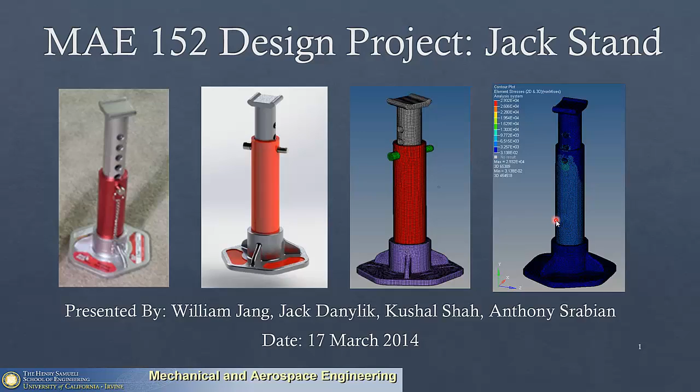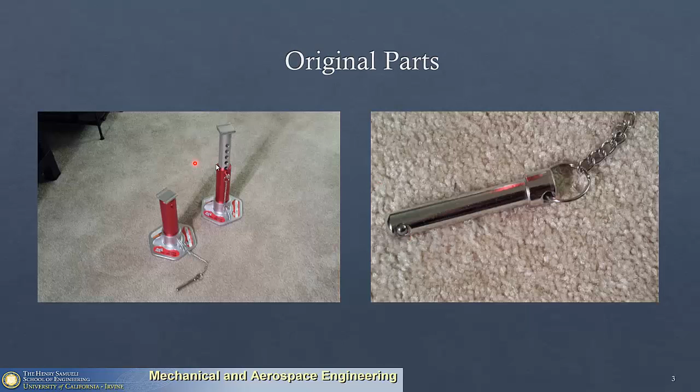The materials for the jack stand: essentially everything is an aluminum alloy besides the pin, which is made out of steel. These are the boundary conditions that we analyzed.

For our initial boundary conditions, we fixed one edge in all degrees of freedom and had rollers on the rest of the face. Another condition we analyzed was having only one node specifically fixed and then two other nodes with rollers. Both of these cases were simply supported.

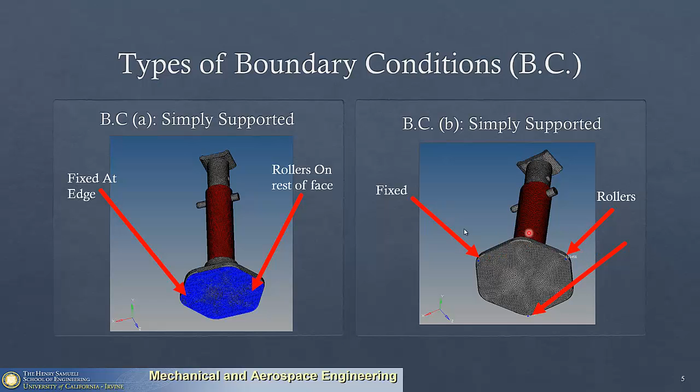The types of loading we analyzed included a distributed load on the center face of the top of the jack stand, and another load case applying all the load onto just one lip of the jack stand.

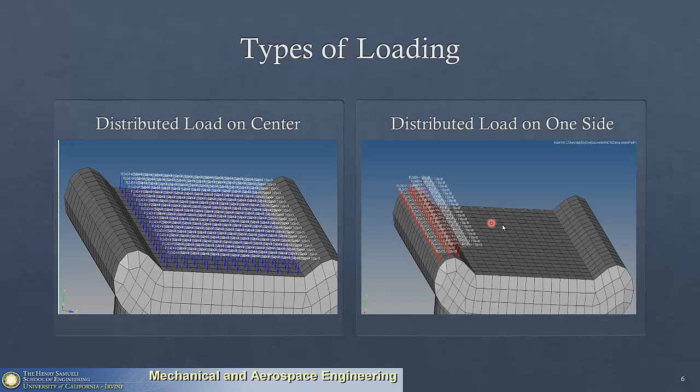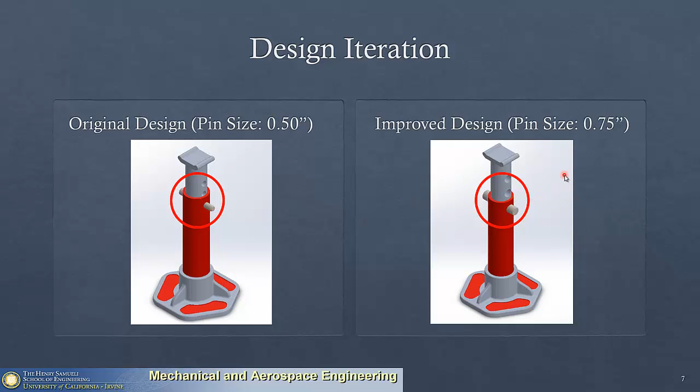For our design iteration, we determined that the pin was a limiting factor for our jack stand in terms of capabilities. So what we did was increase the diameter of the pin and also the hole diameter in order to improve the design of the original jack stand.

Now we're going to go through the studies of the original design. We put a 2-ton distributed load on the top of the jack stand, with a simply supported boundary condition at the bottom face.

These are the results from that study, and we see there's a concentration of force where the pin interacts with the two parts of the jack stand. The maximum stress is around 30,000 psi, which is pretty close to the yield strength of the aluminum alloy.

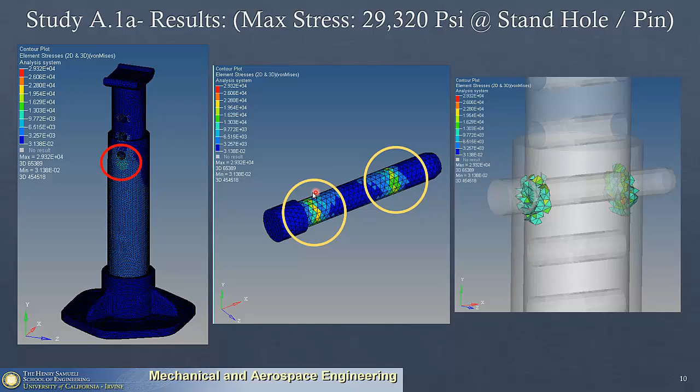The pin is stressed, but not nearly as stressed as the aluminum because the pin is made out of steel. Still, there's a high concentration of stress on the area where it interacts with the jack stand, so we wanted to test to make sure this was correct.

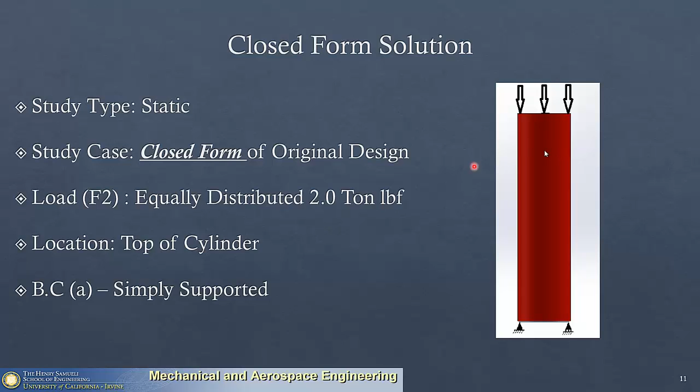We did a closed form solution where we modeled a hollow cylinder part of the jack stand and put a 2-ton-pound force on the top, also simply supported. We calculated all the math out, and figured the average stress on the cylinder should be around 3,018 psi.

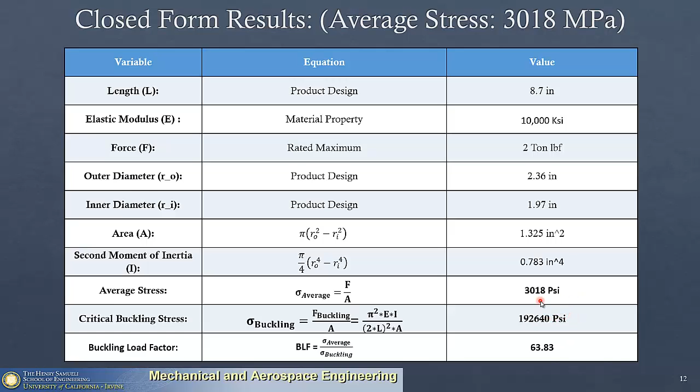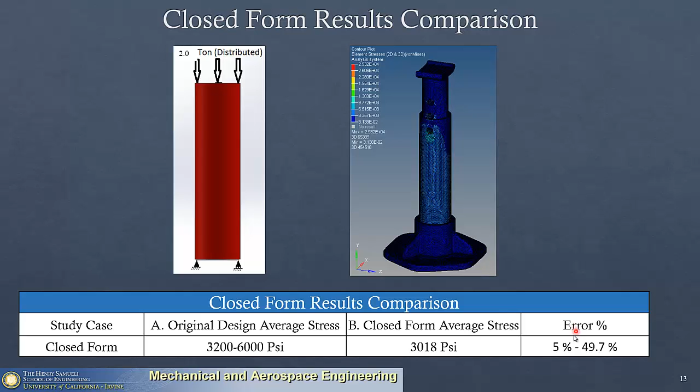We also ran buckling just to make sure it wouldn't be significant. With this closed form solution, we see a pretty good agreement with our model, because on the original design, the highly stressed area is only where the hole is, where the pin goes through. On this area, we see it's much closer to the 3,000 psi estimated average stress the closed form solution provides. We have about a 5% to 49% error, but that's really just because of the hole, which was not accounted for in this closed form solution.

We wanted to verify that our boundary conditions chosen to model the jack stand were accurate. So we ran study A-1A, but with new boundary condition B, where we have 3 nodes which are the fixed portions of the model: 1 is fixed and 2 are rollers, so it's still simply supported.

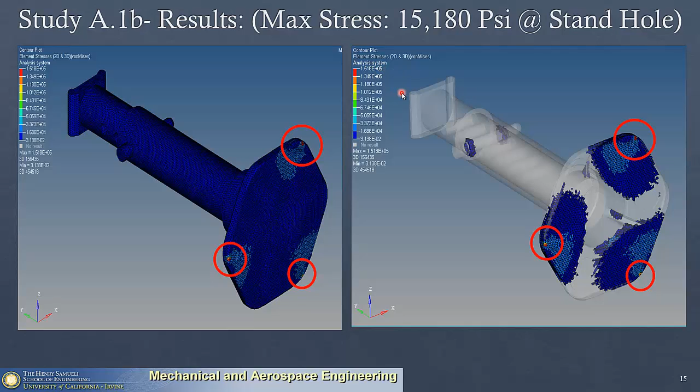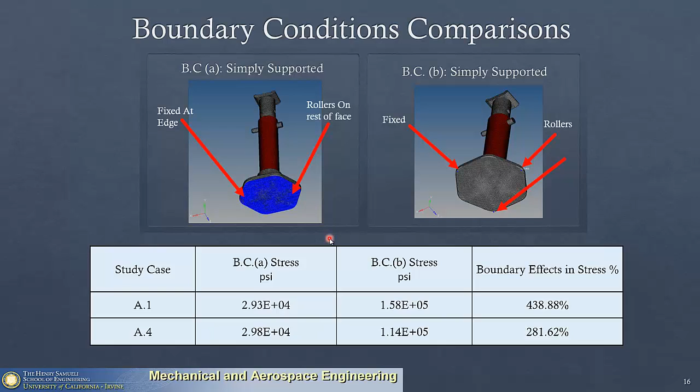We found that this did not work out well, because the areas where the geometry was held were an order of magnitude, 10 times higher than the yield strength of the jack stand. This is a comparison, and we see a huge difference between these two boundary conditions. Because boundary condition A accurately modeled the advertised 2-ton jack stand, we decided to go forward with that boundary condition.

Our next load case was a 1.5-ton load distributed on the side lip of the jack stand. It's still a simply supported boundary condition.

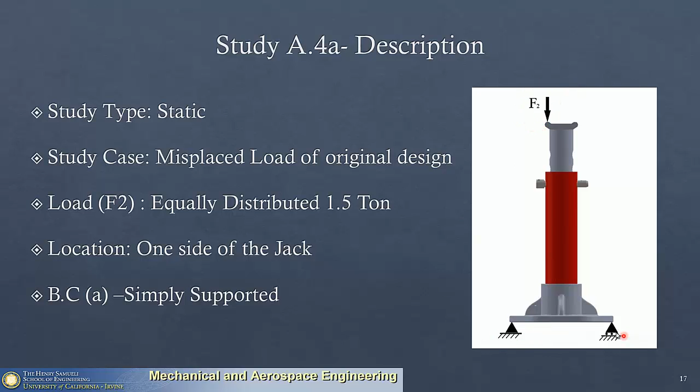We went with boundary condition A, and these results are pretty interesting. Where the force is applied, there's concentration of stress on the top surface, but also on the sides where the top part of the stand is bending. It's not as significantly stressed as the 2-ton load applied to the top face, but this is still a case of extreme misuse, and we still see concentration of stress on the pin.

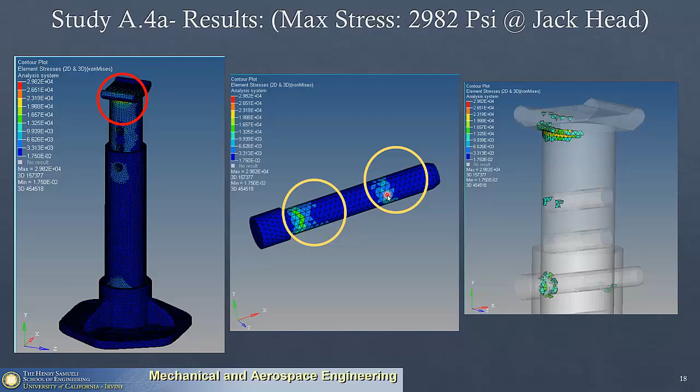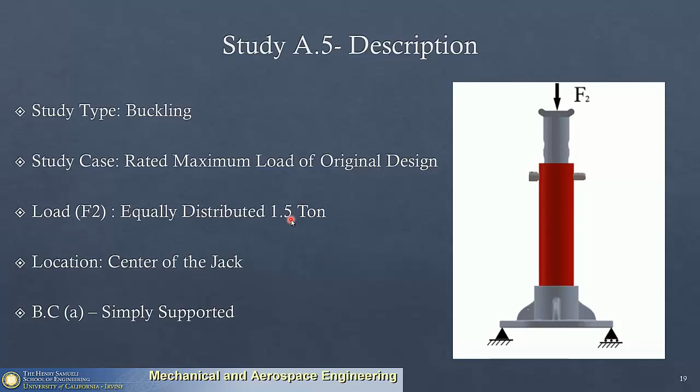The next study we did was a buckling study to make sure buckling was not a problem. It's still a 1.5-ton pound force load distributed on the top surface, and it's simply supported. We see a load factor of 39.766, so buckling is not significant. It's not going to fail by buckling.

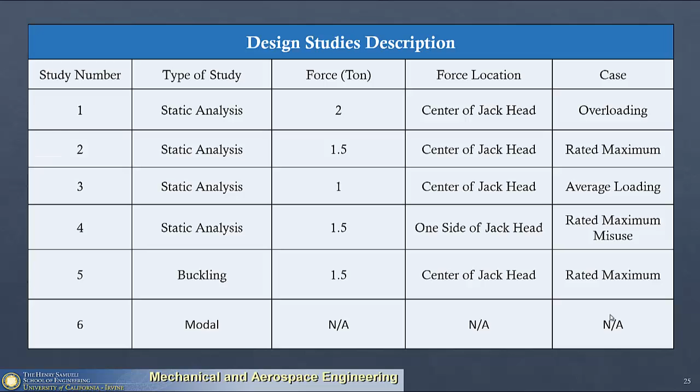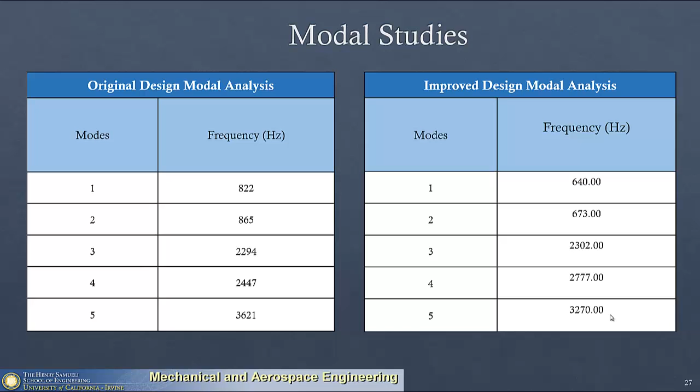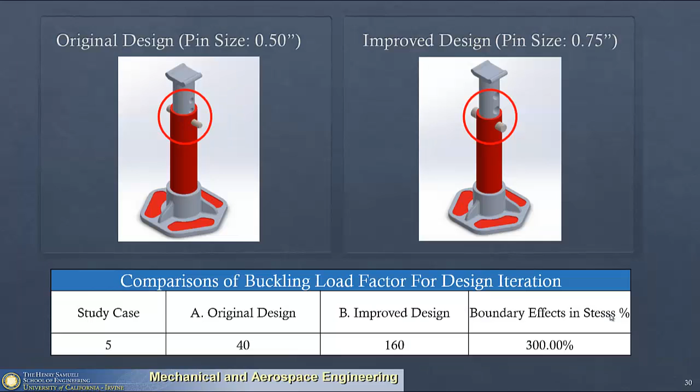Here is the improved design study results, and here is a comparison between the two. This shows the buckling comparison for the two design iterations. Thank you very much.